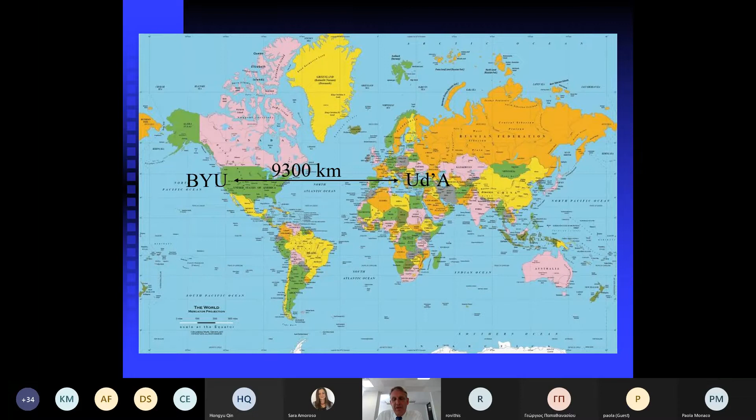BYU is about 9,300 kilometers from Chieti, so it might seem like we're a long ways apart, but if you have the right perspective, you'll see that we're next door neighbors. You have probably learned over the last year, like I have, that the world is getting smaller every day. With the new technology we have, we can interact with each other very closely, even though we might live around the world. So I'm using this perspective to think about each of you as my friends and colleagues.

Turns out I come from a line of geotechnical engineers. This is my father, Ralph Rollins. He performed investigations for about 5,000 structures and 90 dams when he was alive. Since he was a professor, I got to take soil mechanics and foundation engineering from him, and for me this was a real pleasure. I don't know if you would like having a class from your father or not, but I really enjoyed this.

This is my daughter, Rachel Rollins, who was a civil engineering student at BYU. Again, I don't know whether she enjoyed it or not, but she took soil mechanics and foundation engineering from her father as well. So I've written a paper with my father, and I've written a paper with my daughter. This is my granddaughter, Ella, who's showing some early interest in soil behavior, and we hope that keeps up.

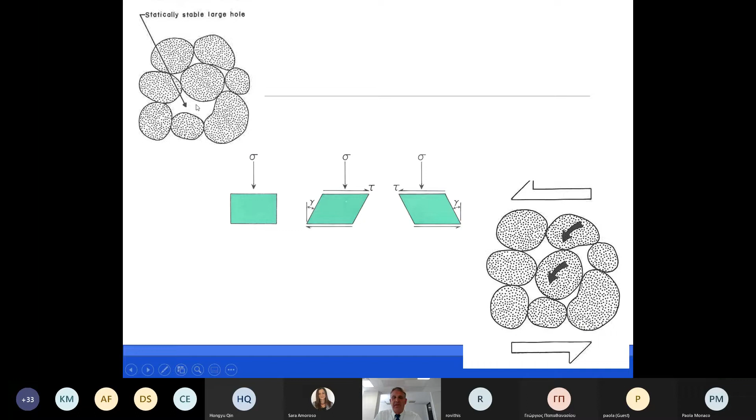Let's talk now about liquefaction. Sarah told me that there might be some who are new to this topic, so I wanted to give a little background. Liquefaction normally occurs in loose saturated sands, like you see up here, where this is saturated void space. When the earthquake starts to shake the ground and shear stresses are induced, there's a tendency for those sand particles to consolidate, and this increases the pressure in the water. Eventually the pressure in the water can equal the vertical effective stress and lead to a condition of liquefaction.

One of the leaders in our field was H. Bolton Seed, or Harry Seed, and he originated techniques for liquefaction assessment with simple methods that could be used by regular engineers. His approach was to use case histories to identify sites where liquefaction had occurred and plot them in terms of cyclic stress ratio versus blow count, taking open points where no liquefaction occurred and drawing boundary lines. These are defined as triggering curves that decide whether liquefaction would be triggered for a given blow count. In class, Harry Seed used to say, get the facts first, the theory can come later, then you'll have something to base the theory on. So he didn't try to fit the facts to the theory, he did it the other way around.

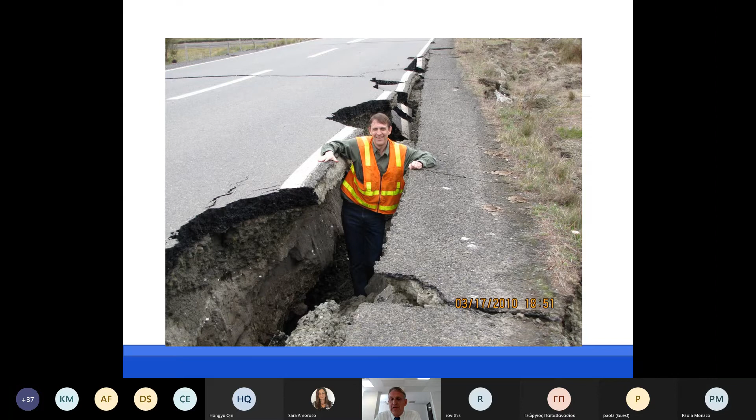This is a tradition that lives on in the United States with the Geotechnical Extreme Events Reconnaissance Team, where we receive money from the National Science Foundation to investigate after important seismic, landslide, and hurricane events. I was part of the team that went to Chile after the 8.8 magnitude earthquake, and part of the first team that went to Tohoku after they decided it was safe enough with the radiation being emitted from the damaged reactor. Here I am with Steve Kramer and Youssef Hashash as part of that study. These post-earthquake investigations are really critical for us to learn how things really work in the world.

Liquefaction can induce a number of problems. It can cause a loss of bearing strength, which results in settlement of our structures. It can cause flow failures. It can cause lateral spreading.

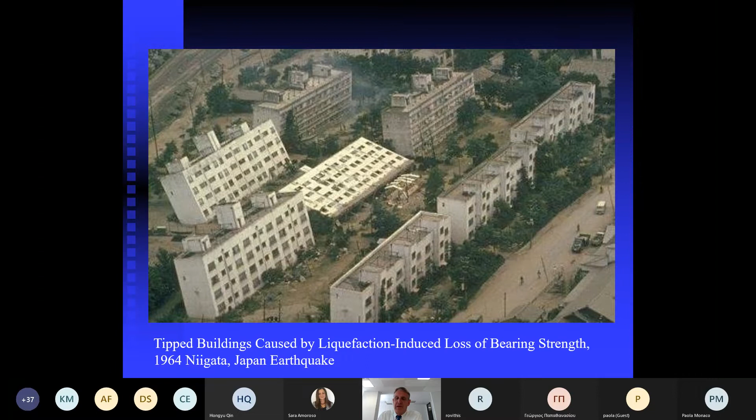When we talk about bearing capacity failure, a building may be perfectly stable on the soil in its static condition, whereas after an earthquake, when the soil liquefies, the building can tip and settle. Here's the classic picture from Niigata, Japan, where many of these buildings tipped and fell over. Some of the other buildings did not tip, because they have deep basements that gave the building much more stability. The other buildings have shallow foundations. This is what you might call a geotechnical failure, but a structural success story, because even the building windows weren't damaged and people could walk up and get their belongings and bring them back down.

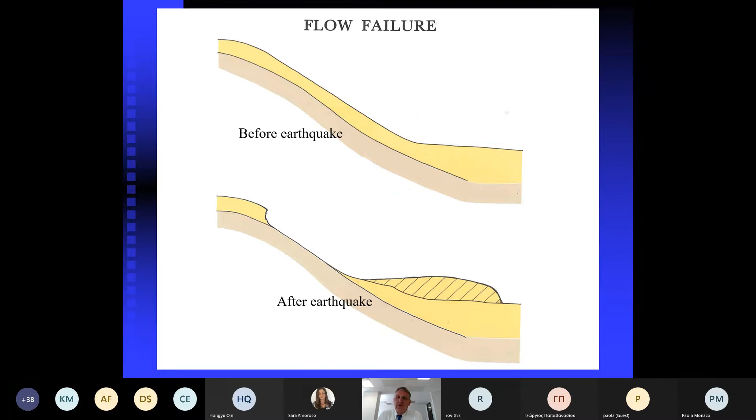One of Harry Seed's triumphs was reconstructing the cross-section of Lower San Fernando Dam based on the final failure surface, identifying these zones in blue where the soil had liquefied, piecing them back together and then identifying the area which had liquefied. As a result of this case history, we now have techniques for predicting performance of dams in earthquakes.

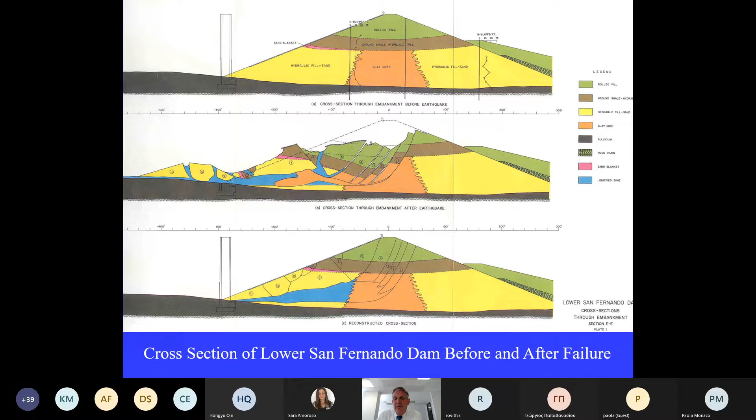A third problem is lateral spreading. Before the earthquake, potentially liquefiable soil might exist below a non-liquefiable clay layer. After the earthquake, the sand can liquefy and these top layers of clay can float along on top of the underlying soil towards a free face or towards a river.

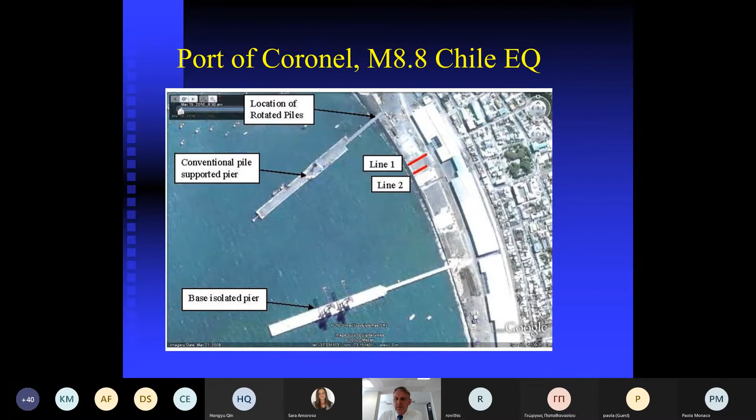We saw similar things at the port of Coronel after the Chilean earthquake in 2010, where this conventional pier was damaged to the point it could not be used. You can see the surface of the asphalt as a result of lateral spread, and many of the containers fell off of one another.

We went in and measured the displacement. There had been a little over a meter of displacement at the edge of the port, and it went back to about zero displacement within 20 meters.

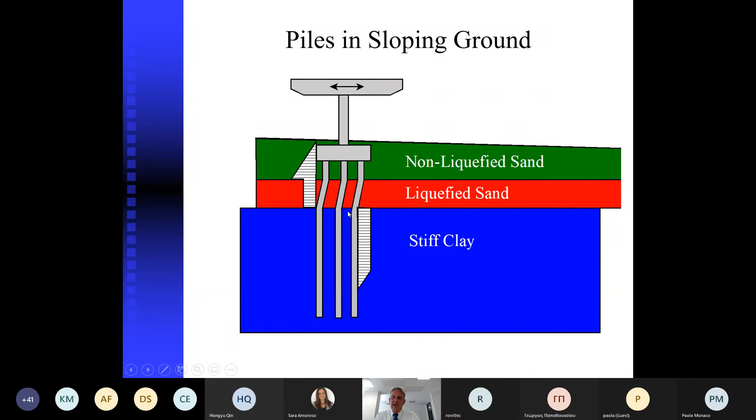Here's damage to piles at the port of Coronel in Chile. We wondered if this pile was a battered pile, but no, it had been driven vertically, and ground movement in this direction caused the pile to move about a meter. I have Dominic Assimaki here for scale, and you can see the ground has moved about half an Assimaki.

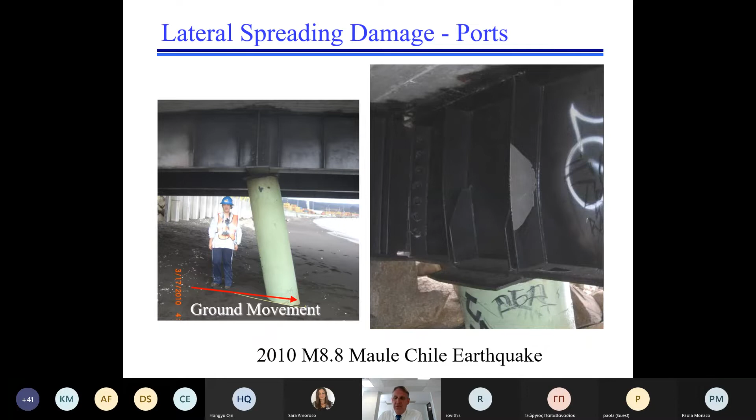As a result, we had buckling of the cross beam on one side, compression failure, and tension failure on the other side. My structural engineering friends tell me that's exactly what we want it to do, absorb all that energy and still remain stable after the earthquake.

How can we investigate this liquefaction phenomenon? We can do so with small-scale testing, with centrifuge models maybe 1/50th the size of the soil, or with laminar shear boxes, where these segmented steel boxes are shaken and move like they would in an earthquake.

But more frequently, we would like to see things at large scale and how the earth really performs. As mentioned previously, post-earthquake investigations are always desirable, but in many cases you don't have all the information you'd like to better understand how the bridge really performed, particularly if it had collapsed.

You can use a vibroseis truck to shake the ground and cause liquefaction; this has been very helpful in work in New Zealand. Or you can use controlled blasting, which is what we have tried. No method is perfect—each tells us a little bit of the entire story, so it's useful to investigate with all these techniques. But blast liquefaction has a number of advantages.

First, it tests at large scale. It can test the native soil in situ with real microstructure and aging. You can liquefy large volumes at one time, investigating the performance of an entire system, to maybe 10, 14, even 20 meters deep. We have seen settlement similar to that induced in a real earthquake setting.

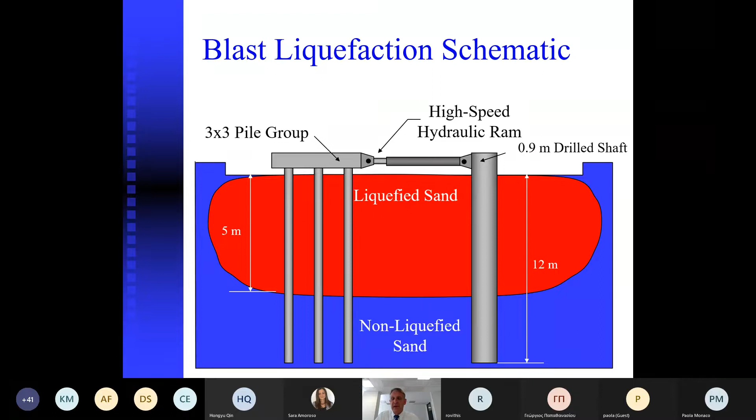And since that time, we've done tests like this at a number of sites around the world. So our dream has become kind of a reality here. Our approach was to first experiment to see what it took to cause liquefaction, prior to putting the foundation elements in. We liquefied the ground using these explosives and measured with piezometers to see that we really did liquefy the soil. Here we always use licensed blasters to do this work.

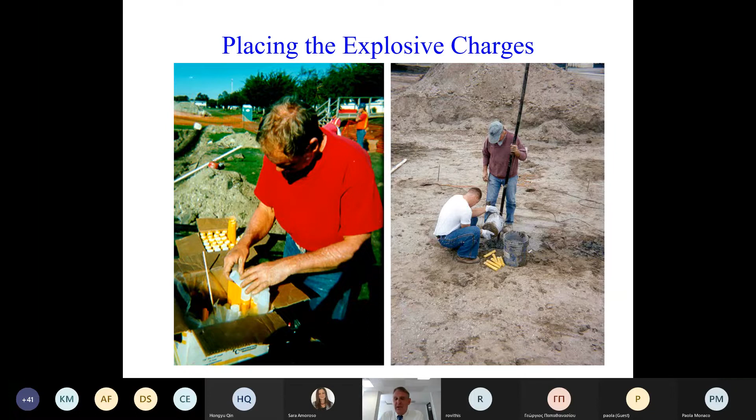This is Butch mixing the nitromethane and ammonium nitrate and putting it into the hole. And this was our first test.

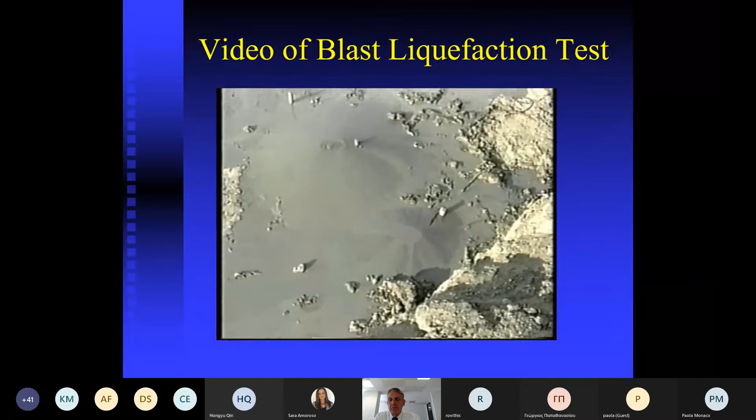This should look similar to what we saw at Tohoku in a natural earthquake, where there were liquefaction features, these sand boils or sand volcanoes, as a result of the testing. And from this testing, we were able to investigate the lateral resistance of a pile, first for a single pile, and then for a group of piles.

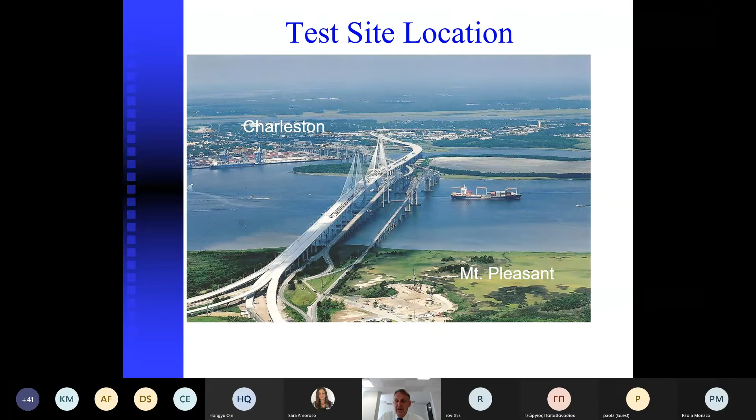Subsequently, we had the opportunity to do this test in Charleston, South Carolina, for a new bridge that was being constructed, a cable-stayed bridge, one of the largest in the United States. And the designers of the bridge wanted us to investigate how the foundations would perform in this situation.

One of the problems with the previous testing was that it was under static conditions, and we wanted to load it dynamically. So we used this statnamic load sled, a rocket sled, where we detonate fuel pellets, and they expand and have gases that move out in one direction, and that causes the sled to move in one direction and the foundation to move in the other direction.

So here's this sled being put into place on a little runway. It weighs about 100 tons. It's put into position in the combustion chamber, about 2.5 meters in diameter. Then this was fired off.

And just so you can see what that looks like, I'll show this video.

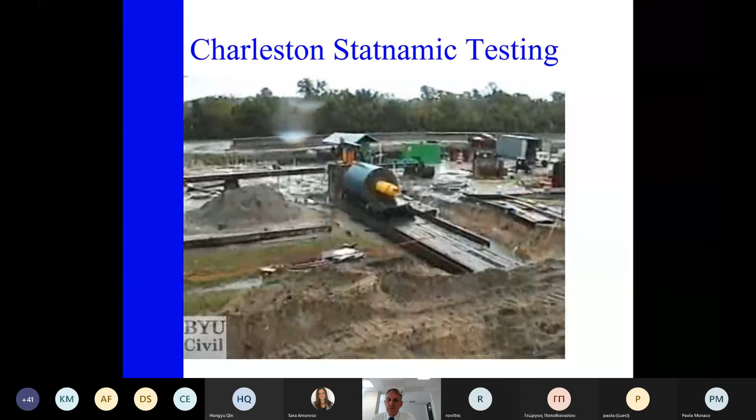It's about 7,000 kilonewtons. So there's opportunities for doing this. This has been done by a number of researchers, including my colleagues in Japan. They told me once, Kyle, your baby has grown up. They had a very huge, hundreds of charges going off to investigate a variety of ground improvement techniques.

It's also been used in Christchurch, New Zealand, and we'll talk more about this in a couple weeks' time at the second webinar. So blast liquefaction testing does provide a very useful method for evaluating pile and ground improvement in situ at large scale. It has the potential for liquefying large volumes and to great depth, and we can induce settlement and pore pressures similar to that from an earthquake.

It turns out I also have come from an academic family tree. Karl Terzaghi was the major advisor for my professor, Harry Seed. And of course, we all know Karl Terzaghi is the father of soil mechanics, and we can recognize Harry Bolton Seed as the father of geotechnical engineering. I haven't lived up to the full potential at this stage, but I can call myself the father of Rebecca, Rachel, and Chelsea, my 3 daughters, and maybe at some point the father of blast-induced liquefaction.

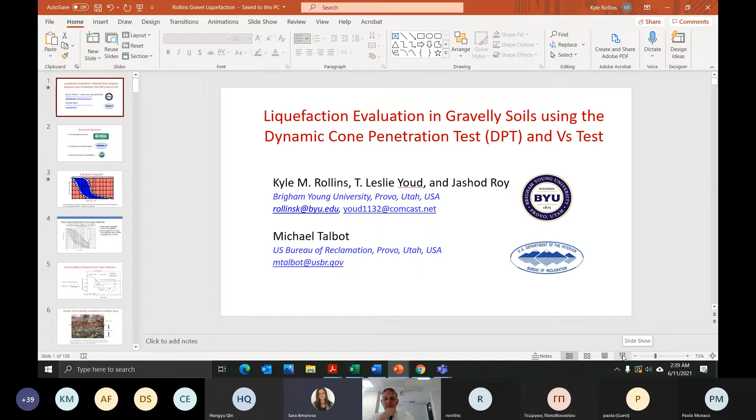Okay, I might mention that we've done several of these blast-induced liquefaction studies with Professor Amoroso and Professor Tonni and Gottardi at University of Bologna, and it's been a pleasure working here in Italy on these kinds of studies.

I'm going to talk now on liquefaction evaluation in gravelly soils using a new tool called the dynamic cone penetrometer test and also shear wave velocity tests. My co-authors on this study are Les Youd, who you might know as an expert in lateral spreading, and my graduate student Jashod Roy, and another graduate student named Michael Talbot, who works with the U.S. Bureau of Reclamation. This research has been sponsored by the U.S. Geological Survey, the U.S. Bureau of Reclamation, who's responsible for the design and maintenance of dams in the United States, and the National Science Foundation.

Based on some early numerical analysis, we have suggested that if the permeability is greater than about 0.004 meters per second, pore pressures will dissipate as rapidly as they develop.

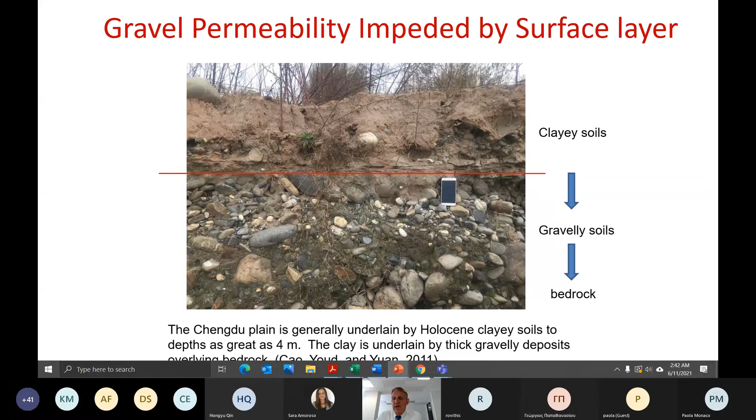There'll also be cases where gravel permeability is impeded by a surface layer, and this surface layer could consist of clay or silt, or even a thick layer of concrete, for example at a port facility. This is a photo of an excavation in China where they typically have 4 meters of clay overlying a gravel profile with fairly large gravel particles.

But there's now a growing set of case histories, even some in the last year or two in Croatia and Albania, something like 22 earthquakes in the last 100 years where gravel liquefaction has been reported. So it's not just an imaginary thing, it's something that is happening routinely in every major earthquake.

And two of those major earthquakes are in Italy: the Messina earthquake in 1908, and the Friuli earthquake in 1976.

So if we look at gravel liquefaction sites around the world, there's a growing number where people have identified gravels that have liquefied and done studies to quantify what's happening.

This becomes a major issue for older dams because many times they were built on profiles that contained liquefiable gravel, but gravel wasn't supposed to liquefy at the time these dams were built. Now it becomes a multi-million-dollar decision to decide if there is a liquefaction hazard, and if so, how that soil should be treated to prevent liquefaction in the event of an earthquake.

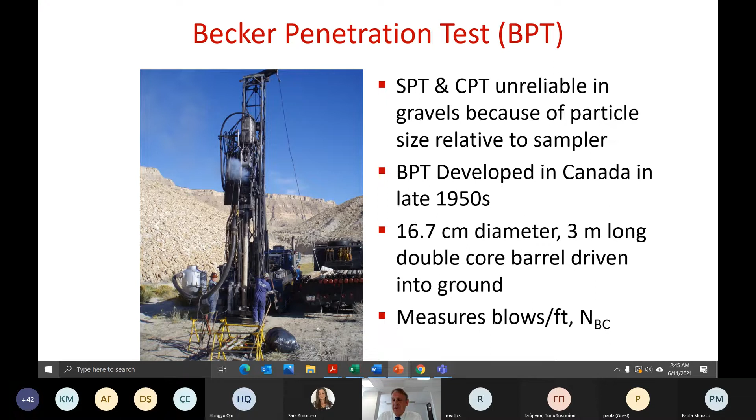So this BPT test was developed in Canada in the late 1950s to help address this issue. The diameter of the pipe is about 16.7 centimeters. It's driven into the ground in 3-meter long intervals in a double core barrel with a diesel hammer. It's like a small pile driving hammer, and it measures the blows per foot, which we call N sub BC, from the bounce chamber pressure.

Now, what has been done to utilize the Becker penetration test is to develop, in sand, a correlation between the SPT blow count and the corrected Becker blow count. So if you had a blow count of 40 from the Becker penetrometer, you could then determine what the SPT blow count would be to use in your analysis.

Then you could come to your favorite model for liquefaction triggering and determine the cyclic stress ratio which would cause liquefaction.

One of the problems with this technique is that it has a straight-sided pile, and the result of that is that you can have friction on the side of the pile, which will reduce the amount of energy that's transferred into the pile or into the Becker penetrometer, and artificially increase the blow counts.

So Jason de Jong has come up with an innovative technique to measure the force that's transmitted to the bottom of the Becker penetrometer, and has developed a new correlation between the penetration resistance at the bottom and the SPT blow count.

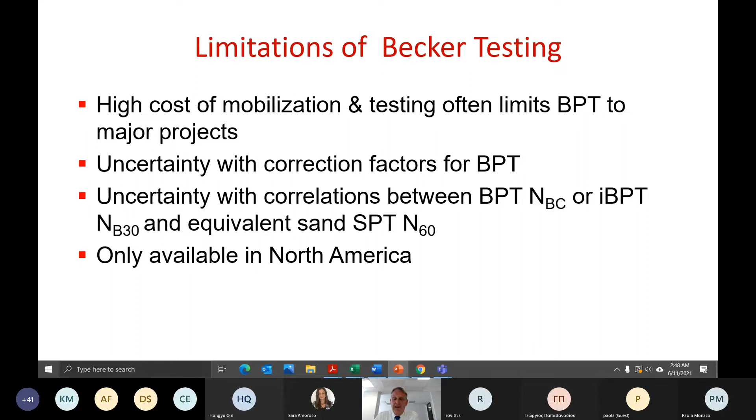Some of the limitations of Becker penetration testing: there's a high cost to mobilize it to a site in the United States, and the testing costs are often high enough that we can only use this for major projects, not routine testing at all. There's some uncertainty with correction factors for the Becker penetration test, and uncertainty with the correlation between the blow count for the Becker and the blow count of our equivalent sand. Probably the biggest problem with this method is that it's only available in North America, so most of the world doesn't have access to a test like this that could be used in critical cases.

One technique is the Chinese dynamic cone penetrometer. It's capable of penetrating loose to medium dense gravels. It's relatively fast, simple, and economical, so it can be used for routine projects you might encounter any day of the week. The most important advantage, I think, is that the triggering curves are directly based on field performance, just like all our other curves are. When we use SPT or CPT, we have a direct correlation based on case histories with that test, and we're trying to do the same thing with the DPT.

The Chinese approach is to use a tripod, lift a 120 kilogram weight to a height of 1 meter, and then let it free fall. The cone is 74 millimeters in diameter. It tapers backwards to a smaller diameter drill rod, so there will be less friction between the soil and the rod, making it a more reliable test.

This is about 2.5 times the energy of the SPT test. So you have more energy, a larger penetrometer, and less skin friction. The cone is driven continuously in the ground. You don't get a sample, but like with a conventional cone penetrometer, you get a continuous reading of the blow count versus depth.

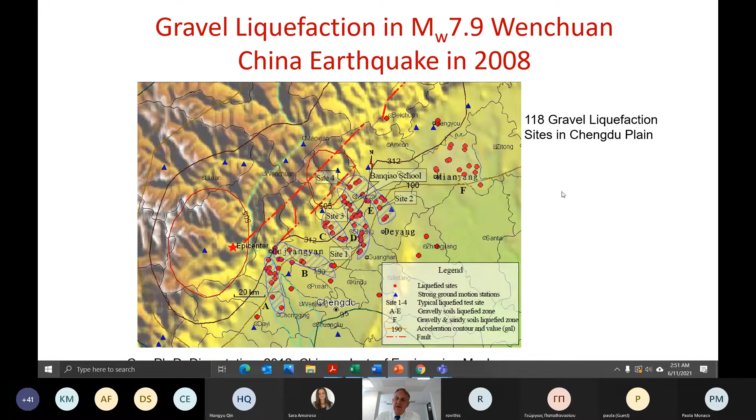This test was first used for liquefaction assessment by the Chinese after the 7.9 Wenchuan earthquake in 2008. When they started to investigate sites, even sites that had what looked like sand ejected at the top, they discovered that the sites were largely sandy gravel. They started the work of investigating 118 gravel liquefaction sites in the Chengdu Plain.

Here's one case history, a lateral spread at Banqiao School. They had 20 centimeters of differential settlement here and had to demolish the school and start again. There were lateral spread displacements of about 1 meter towards this canal or channelized river.

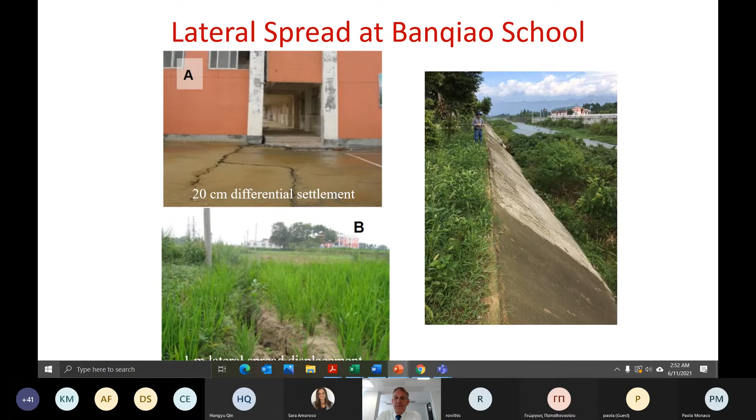One of my colleagues, Les Youd, went to China and recorded the amount of energy that was being transferred into the drill rods as a result of this free fall triggering system, and found that on average they have about 90% energy transfer, using a pile driving analyzer.

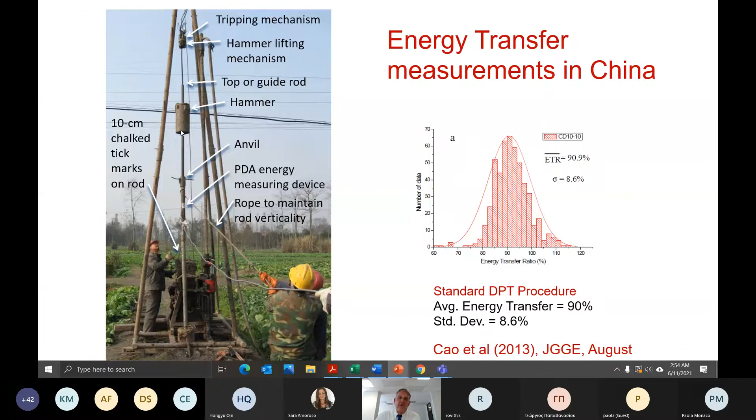And even in some cases they get low counts that are energies higher than 100%. What was happening was the hammer was going higher than a meter before dropping, as they were pulling it up very rapidly. So that's the standard we're comparing against.

We also want to look at triggering in terms of shear wave velocity. The advantage of this is it may not require a borehole if you are doing MASW testing, but there is some uncertainty with this approach. One of the other questions would be, are the curves for sand appropriate for gravel? Or do we need to adjust the curves to have a new triggering curve?

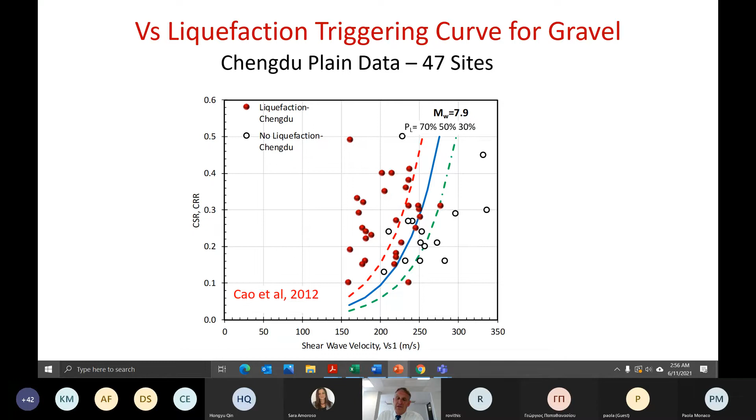We also want to know if we can reduce the spread in the DPT triggering curves with additional data points. Will the factor of safety we get from the DPT be similar to that from our Becker penetrometer? And can we use less hammer energy to do this?

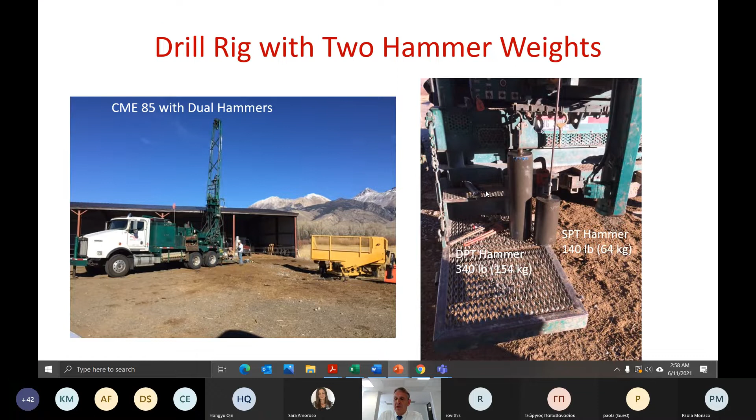At each one of these Becker holes, we did 2 DPTs with the different energy. In the United States, we have a rig built by CME that will allow us to switch from the SPT hammer to the DPT hammer relatively quickly, in about 10 minutes, so we can do both tests.

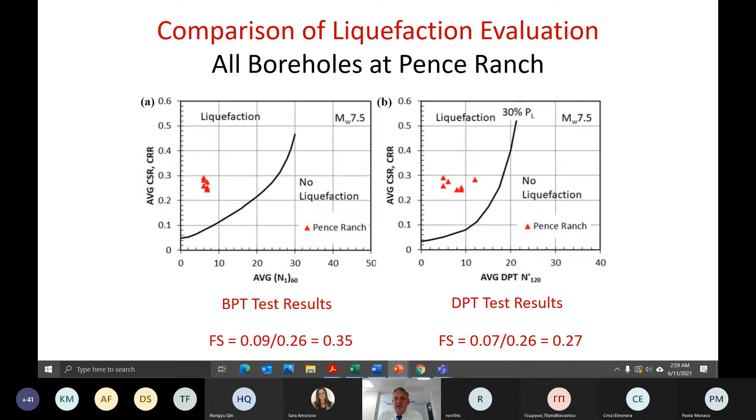So what we did is a liquefaction evaluation at the critical layers with the DPT and the BPT. At all the boreholes at Pence Ranch, for example, we have a factor of safety of about 0.35 with the BPT procedure and about 0.27 with the DPT procedure. So this is giving us some encouraging results - the two hammer energies, after correction, are giving us similar blow counts.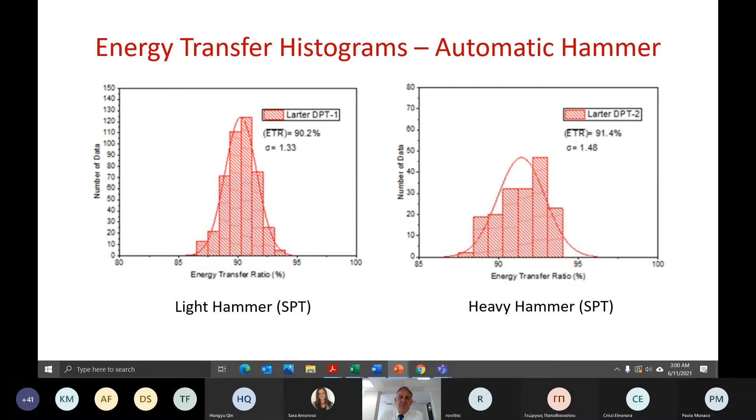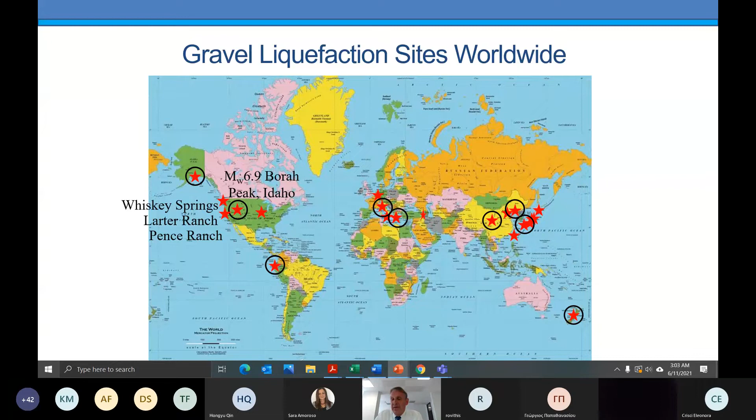So here's a port at Manta, Port of Ecuador, in the Ecuador earthquake, 7.8 magnitude event. This is a pile-supported wharf. Going under the wharf, we could find after the earthquake that a lot of these piles were badly damaged. And when we looked at why that was, we could see that there was a large crack here.

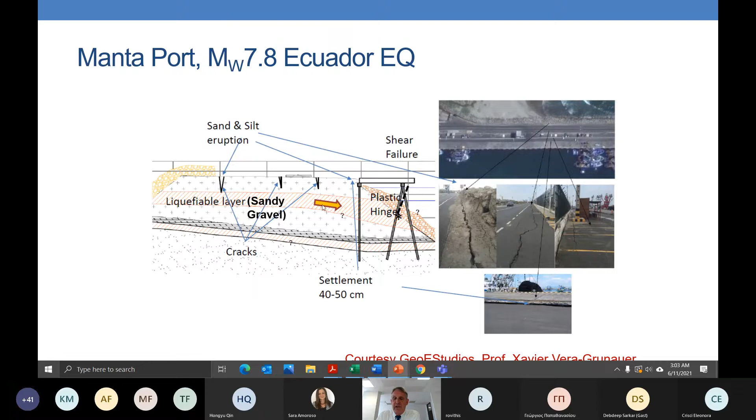Our colleague Xavier Vera worked with us and did tests with the DPT at the port, and they found out that the zone that was causing the sliding and the lateral spreading here was a sandy gravel layer. The sandy gravel had between 15 and 70% gravel sized particles, but with enough sand to still allow it to liquefy even without a bounding layer.

Javier did 7 DPT soundings with energy measurements and also 7 V-sub-S profiles with MASW. And you can see here the zone that is liquefying is this zone from about 3 to 6 meters.

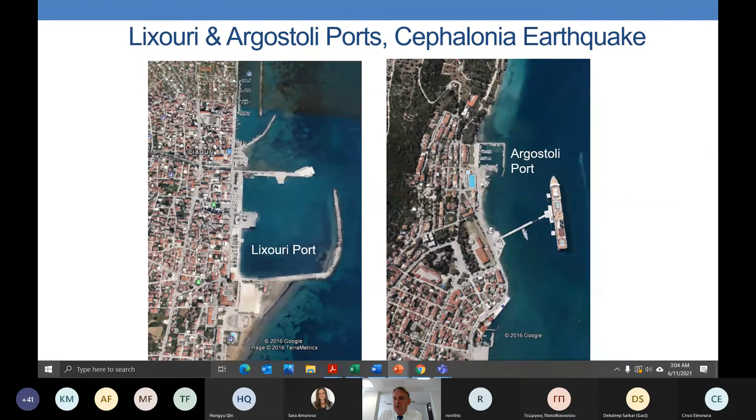We had the opportunity to go to Greece, to the island of Cephalonia, where liquefaction had occurred at several ports, the Lixouri port and Argostoli port. Here you can see lateral spreading that had occurred towards the face of the port. And the ejecta was both sand and gravel coming out of the fractures.

So we used something like 7 locations at this Lixouri port, 5 DPTs, with SPT hammer energy. We did PDA measurements. There were 2 where the gravel was much too large to penetrate, so we couldn't do those, even with our system. We had a track-mounted penetrometer, which was easily able to go everywhere we needed it to, and this PDA device.

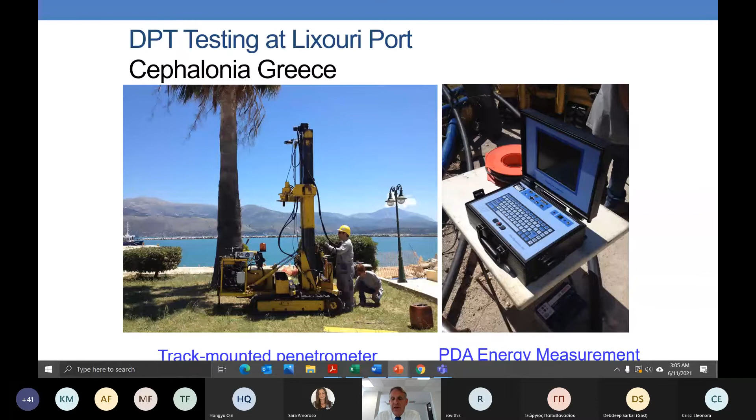If you have to go to a site to do some work, Cephalonia Island is a great place to go, by the way. This is, again, the zone that was identified from the DPT testing, and we have a number of these points that are above the triggering curve, so they're where they should be. These are the average values in those ranges.

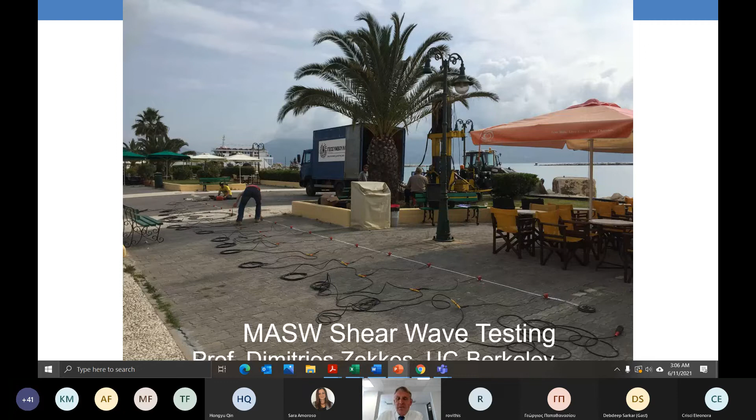Argostoli port did similar work. This is the liquefied layer and the averages, again, above the triggering curve that had been previously established. And our colleague, Dimitrios Zekkos, did MASW testing along the port with his student, John Hubler. So we have this data as well. This shows a plot at the Lixouri port, the Argostoli port.

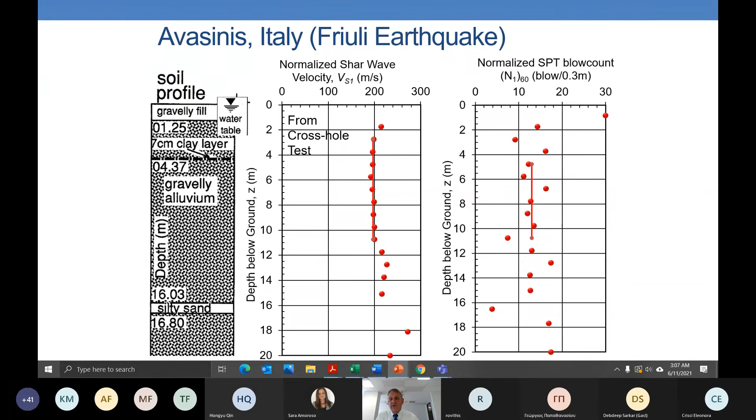We had the opportunity to work with INGV and Professor Amoroso in Friuli to occupy sites where liquefaction had occurred and been reported by Sirovich after the 1976 earthquake. This is an alluvial fan deposit, and there were 3 separate events where liquefaction had occurred. We had 3 sites that liquefied and 1 that did not, and we did DPT at 2 hammer energies there. Here you can see some of the gravel particles in the ejecta in this cornfield. A previous crosshole shear wave velocity test was available here. The grain size distribution curve showed that maybe 20 to 40% of the material was gravel sized.

Here's the DPT testing taking place, and here's the instrumented rod used to measure the energy transfer. From this we can identify the critical layer. This was recently published in 2020 in the ASCE Geotechnical Journal.

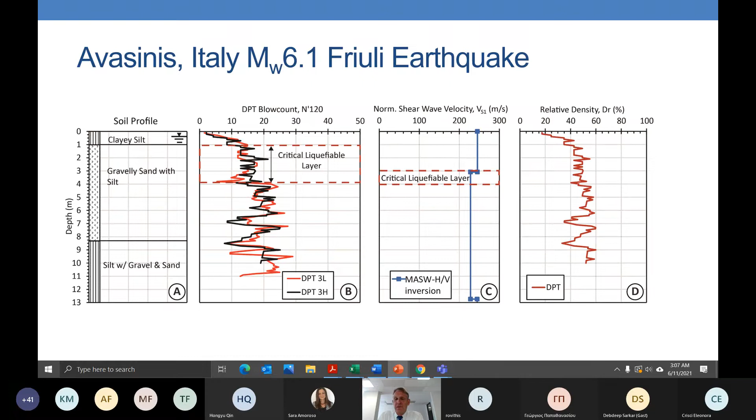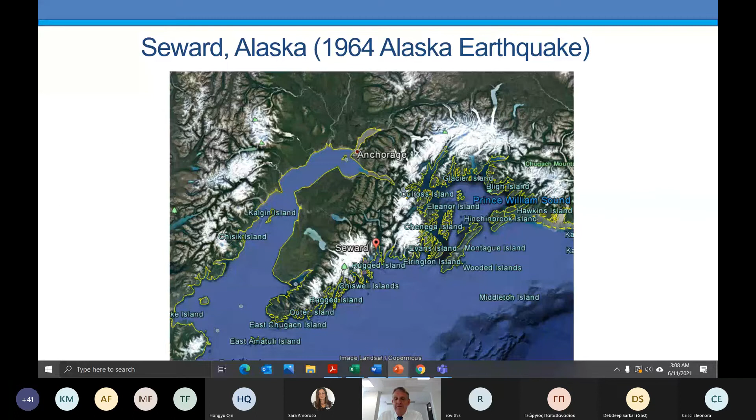Next site was Seward, Alaska. Our colleagues at the Department of Transportation there said come ahead, we'll pay for the drill rig and you can test. This is a site where bridges were badly damaged in the 1964 Alaska earthquake, with large lateral spreading. We did a number of DPT holes here.

The nice thing about this method is that it can operate very quickly. We did 8 DPT holes to about 15 meters in 2 days. We also did PDA measurements, with 2 hammer energies at each of 4 sites where the ground had failed due to lateral spreading, and we had some nearby cross-hole Vs measurements.

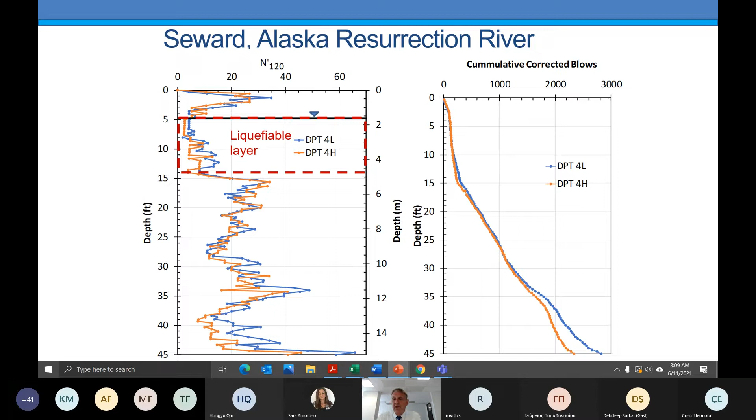This is the liquefiable layer that can be identified here. We also decided to start using a cumulative blow count so that we could compare the blow counts from the light hammer, shown here in blue, and the heavy hammer, shown in orange. If we evaluate over a cumulative interval rather than at each depth, we see very good agreement between the blow counts of the two cases.

If you plot the light hammer blow count versus the heavy blow count, you'll find cases where there's an offset in the stratigraphy that causes confusion. So we would recommend doing this cumulative approach to get the comparison, rather than comparing at the same elevation.

So we've looked at the critical layers from the DPT and from the shear wave velocity, which were quite evident.

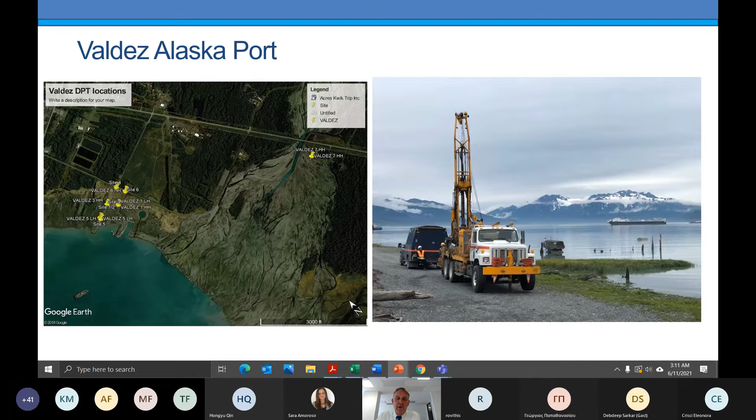We went out to this site and did DPT tests just leading up to where the major landslide occurred, with up to 7 to 8 meters of lateral spread displacement. We were a little nervous whether the DPT could really penetrate through these materials, these very large diameter river gravels. So we decided to try it, and here's the probe penetrating into the ground.

That's an automatic hammer, and it operates very quickly, penetrating about a meter in something like 25 seconds.

Then more recently, we had the opportunity to test at Wellington in New Zealand, where this CentrePort was badly damaged by gravel liquefaction in the Kaikoura earthquake, where peak ground acceleration was 0.22 g.

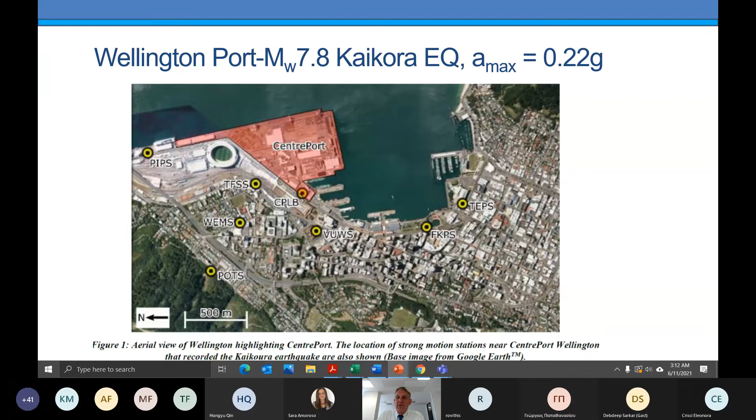It's difficult to test at a port, so we worked with Misko Cubrinovski, who helped us get access at the same sites where he was doing CPT testing. These are our DPT sites, situated at locations where liquefaction took place.

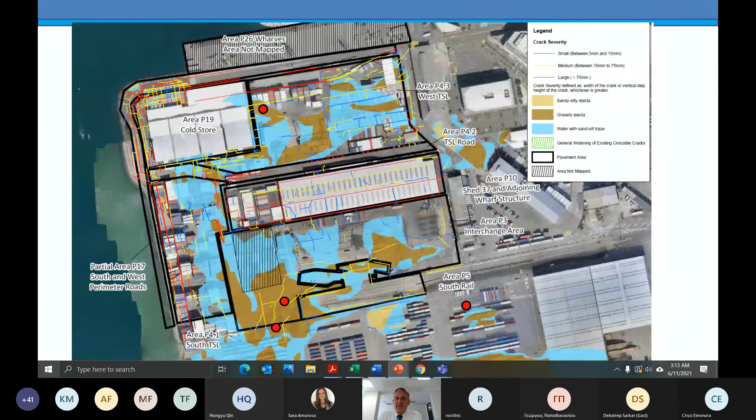It's very important to also have data from cases where no liquefaction took place. So we went to Valdez, Alaska, a site where no liquefaction occurred, to get data to constrain the curves. And we came to L'Aquila, Italy, working again with Professor Amoroso and her students, to find cases that did not liquefy. These are very important and critical to keep the curves from just wandering towards the right. So we did that, which turned out to be very helpful.

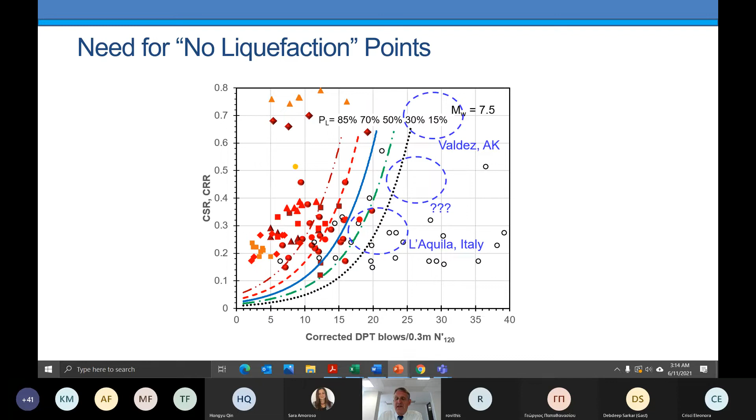Most of our data still comes from China, followed by the US, New Zealand, Greece, and Italy. There are a variety of geological environments, from alluvial fans to glacial fluvial deposits in Alaska. We have a range of magnitudes, and most of the data is within 14 meters of the ground surface, which is very typical of liquefaction case histories.

These plots show the revised triggering curves, this one for the DPT. Here's our DPT blow count, and here's the cyclic stress ratio. All these solid data points are liquefied, and all the open points are sites where gravel did not. You can see these points from L'Aquila were very influential in constraining the curve on the right, along with the data from Valdez, Alaska, where no liquefaction occurred.

So we now have 137 case histories. We're looking for more, of course. They're from 7 different countries, 10 earthquakes. This is a 200% increase in the number of data points we originally had from China, and now instead of just having data from one earthquake, we have them for 10 earthquakes.

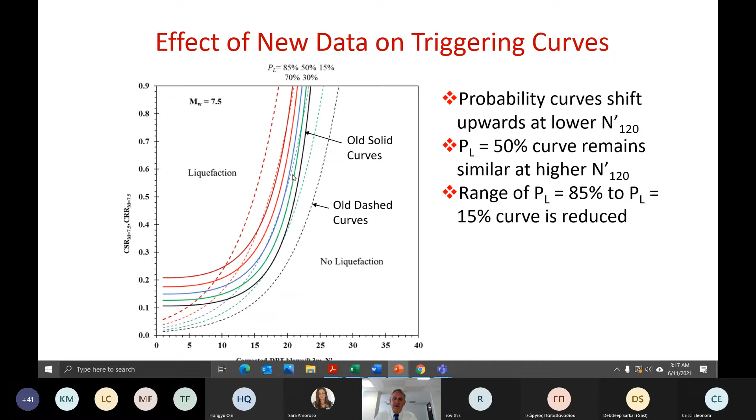If we compare what we had previously, the probability of liquefaction curves are shifting upwards, particularly at low blow counts, to match the results and behavior we had from Greece and New Zealand. So the case histories have made a change in what we're using now to analyze. At higher blow counts, the probability of liquefaction for 50% is about the same as the original Seed curves, but the width of the triggering curves from 85% to 15% has narrowed substantially, so we have less uncertainty about where the boundary of liquefaction and no liquefaction needs to be.

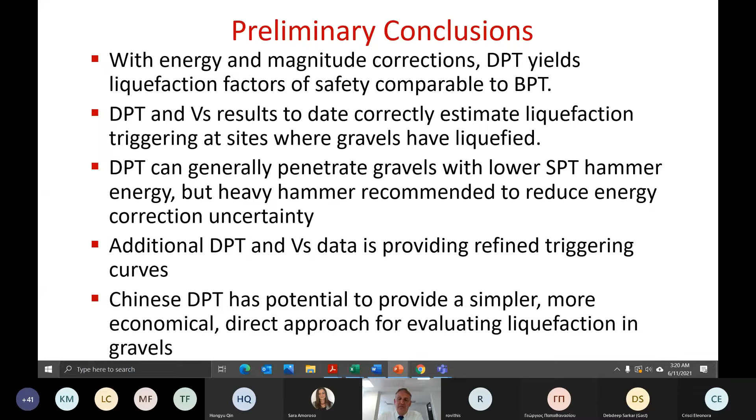Any questions about gravel liquefaction issues?

So in all these cases, we would like to estimate the displacement accurately so that we can determine if our structural elements can tolerate these movements. And if not, we may have to do some ground improvement, or we could potentially increase the strength of our structures, or potentially make our structures more flexible and able to adapt to the displacements that might occur.

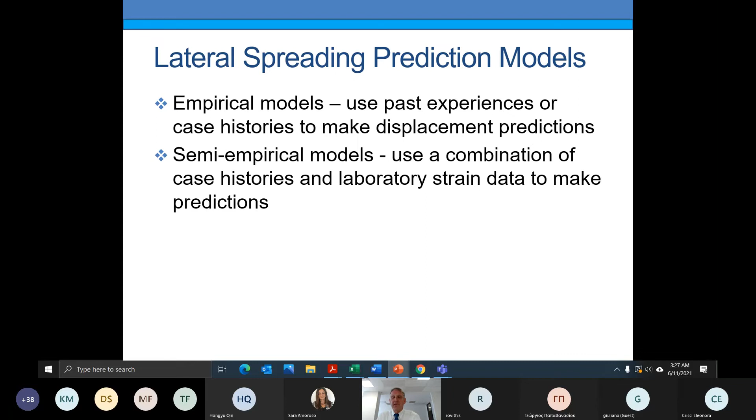Lateral spreading prediction models can be divided into two general types. One are straight empirical models that use past experience or case histories to make displacement predictions. In contrast, a semi-empirical model might use a combination of case histories and laboratory strain data to make predictions. So you may have a relationship between shear strain and relative density from your laboratory, and then you use that to correlate with displacement in the field case history.

So there are at least 6 models that I'm aware of. I don't know how much time we have to spend on all of these, but we've got maybe 20 minutes. I'm going to focus on the Bartlett and Youd and Zhang et al. approaches in the empirical models, and Faris, which was developed at UC Berkeley, and the Zhang, Robertson, and Brachman approach that Peter Robertson and his colleagues developed back in 2004.

There is one case history, the Alaska earthquake, with a magnitude of 9.2, but basing much of the analysis on one case history is asking for trouble. Most models have included this, but it's rather uncertain whether they are appropriate for this large range of magnitudes.

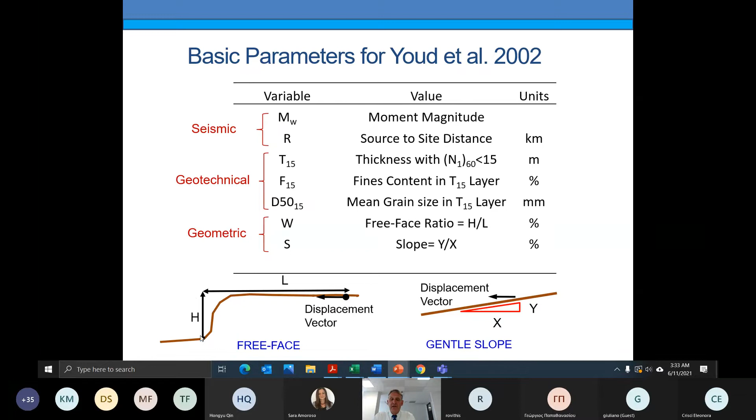Then we have a third set of parameters - geometric parameters that depend on the slope and the offset. S gives the slope of the curve, or y over x. If you have a gentle slope, less than maybe 3 to 5%, or if you have a free face, say at the edge of a river, they recommend using the free face ratio, which is the height of the free face divided by the length to the point where you're computing displacement.

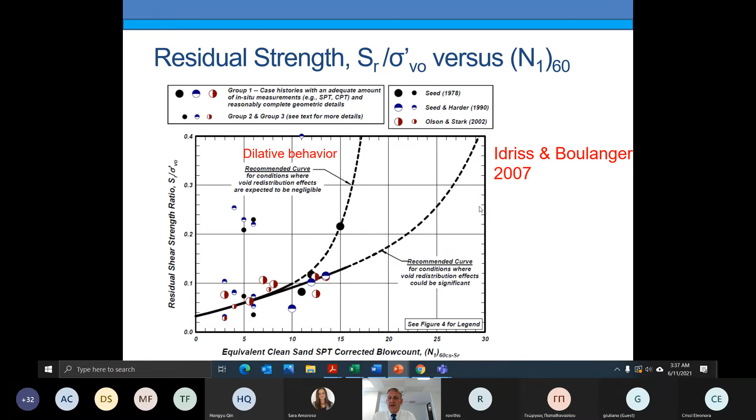Well, if you look at the residual strength curves developed by Idriss and Boulanger in 2007, I believe, they show a curve where the soil is dilative, and where the soil starts to dilate and gain strength, and the pore pressures go down, we see a significant increase in residual shear strength. And it's right about this boundary of 15 to 16, 17. So this is suggesting that soil in an undrained condition becomes very strong due to dilative effects at 15 or higher, and this could explain what's going on.

Youd suggests that if you have a liquefiable layer in a slope, then you make this the height of the free face in the free face ratio. He also suggests that you limit the zone considered for liquefaction to a depth equal to h below the toe of the slope, where h is the height of the slope. His contention is that if you have a pipeline or something below that boundary, the potential for lateral spreading is very low, because the spread would occur above that zone and not cause damage to your pipeline. This needs to be tested with numerical models and more field case histories, but it's worked so far.

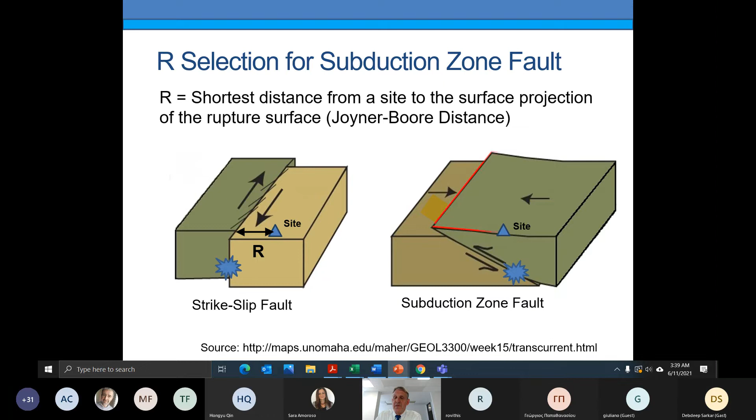One of the problems with the Youd method is the selection of the distance to the source for a subduction zone fault. If we're working with a strike slip fault, we can easily get this distance and it will have some positive value. If we're using a subduction zone fault and our site is located here, then the R value we get is going to be 0, because we're already within the zone of surface rupture according to this Joyner-Boore distance. So in this case, and we'll see the problems this causes, we're almost always at a 0 value.

So when Youd and Bartlett used their method in Alaska, they went from the zone of significant surface energy release, from this distance right here, instead of using the distance from the fault surface of rupture. They used this distance to try and get a better fit with the behavior in the Alaska earthquake.

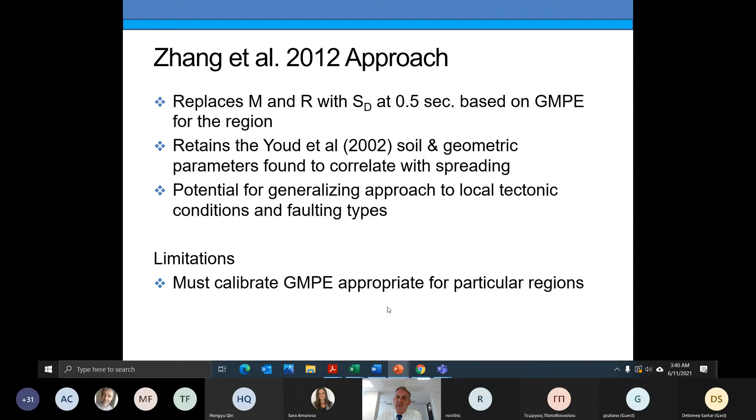To deal with this problem, Zhang et al. in 2012, this is different than the Robertson equation, replaced the magnitude and scale and distance factor with the spectral displacement at 1/2 second period. This is based on a ground motion prediction equation for that region. Then they kept everything else the same as the Youd formulation. The problem with this is now we have to have a calibration of a ground motion prediction equation for each particular region. Zhang was able to get a little better agreement, but not a lot more with his model, but it doesn't have that problem with the R value.

Let's look quickly at some semi-empirical models. I'm running out of time, but Faris's model requires you to have the peak ground acceleration and the magnitude. So here again, we don't have to worry about the R distance. It uses the SPT blow count and correlates with shear strain, that's the geotechnical parameter. Then for the geometric parameter, it uses the slope angle or the height divided by 0.25 times L max, which is the maximum length of failure.

This correlation is based on maximum ground movement. Instead of giving you the displacement at different distances from the free face, it'll only give you one value, and as a result, it's going to give larger values than Youd.

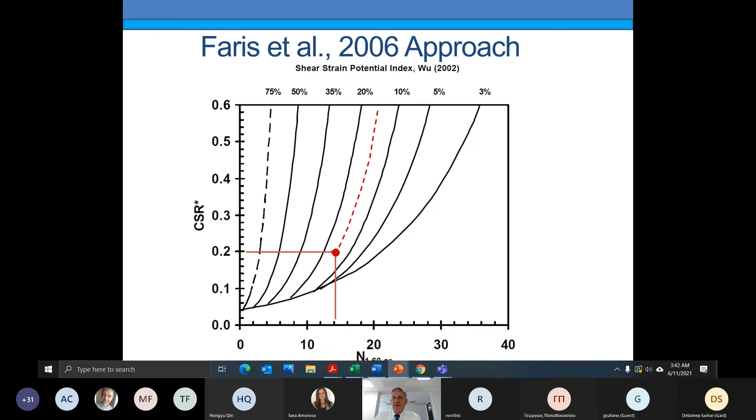Liquefaction assessment is based on the Seed et al. approach, supplemented by the Youd et al. method. For example, with Faris, if you have a blow count of say 14, you can come to this curve and get your strain potential index for a given cyclic ratio. That would say the maximum strain you could have from laboratory testing is 15%. So for each layer within the liquefied zone, you'd find this maximum strain potential.

You'd multiply it by the thickness of that layer and get your damage potential index max. Then that would be used to calculate the maximum displacement with this empirical equation based on this DPI max and some slope properties.

Here's her original database. Does this look familiar? It should. Again, if you look at the predicted and measured 45-degree line, we're off by a factor of 2 in both directions. So trying harder, with a little better, more refined seismic parameters, doesn't give much better estimate.

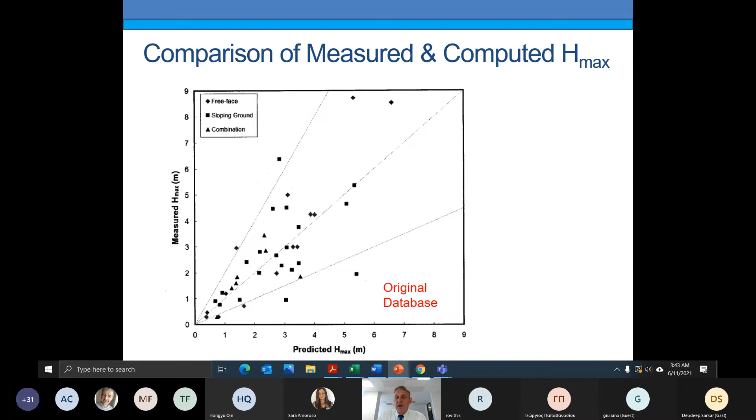So it eliminates the R term. It correlates with the physical shear strain. It considers layers with a blow count greater than 15. There's no limitation on depth, unlike Youd, and it only provides a maximum value.

Zhang et al. gives you peak ground acceleration and M sub W for the seismic parameters, a correlation between cone tip resistance and shear strain for the geotechnical properties, and the slope angle or free face ratio. Displacement is based on maximum ground displacement again, and he uses an adjustment based on Ishihara's work.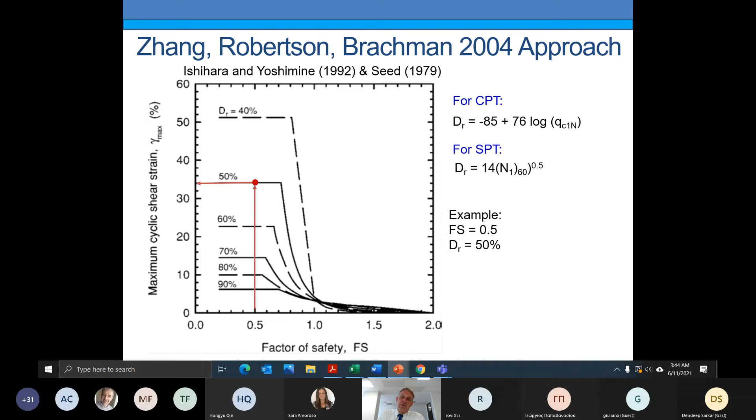So if he has a factor of safety of 0.5 against liquefaction and a D sub R of 50%, you get a maximum strain of 32%, 34%. Then again, like the Faris model, you add those up to get an LDI max, and then use this empirical correlation for different slope geometries.

And here's what he's getting for these different slope geometries. Look familiar? Once again, we're off by a factor of 2. This may be about as good as we can do with these empirical correlations.

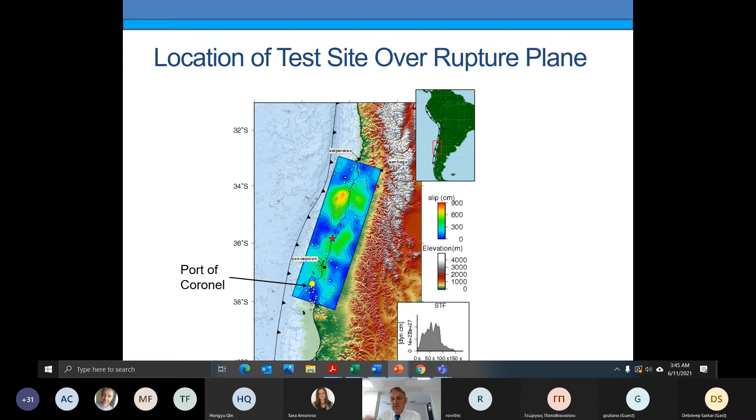I'm going to skip quickly because I'm running low on time, but we looked at the Chilean earthquake, which had a very large rupture zone that you see here, and our site lies directly above the rupture zone. In this port, the Port of Coronel, we have 4 piers that we studied here, here, here, and here.

It turns out that as you go further south, you get more shallow deposits and less lateral spreading. So here we have a maximum of 2.8 meters of lateral spread, 1.5, 0.47, and 0. So it's kind of like a full-scale laboratory to see how our models do with 4 different case histories in our big sandbox.

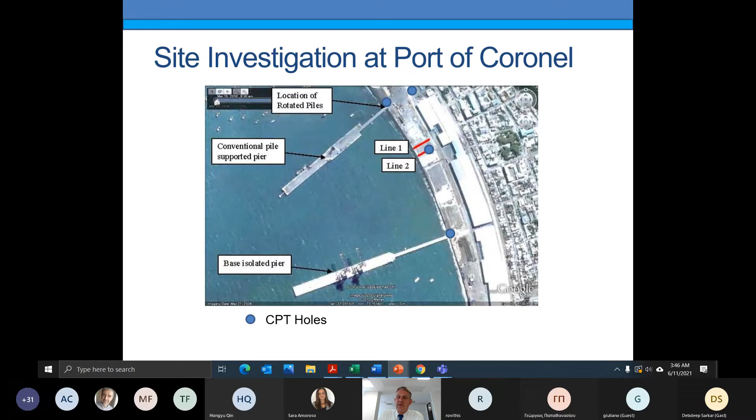As part of our work, we did site investigations at this Los Rojas Fisherman's Pier. We have tests out in the ocean, CPT tests as close as we could get, here, here, and here. We also have some CPT holes at each one of the other sites, and some on the pier itself that we were able to obtain.

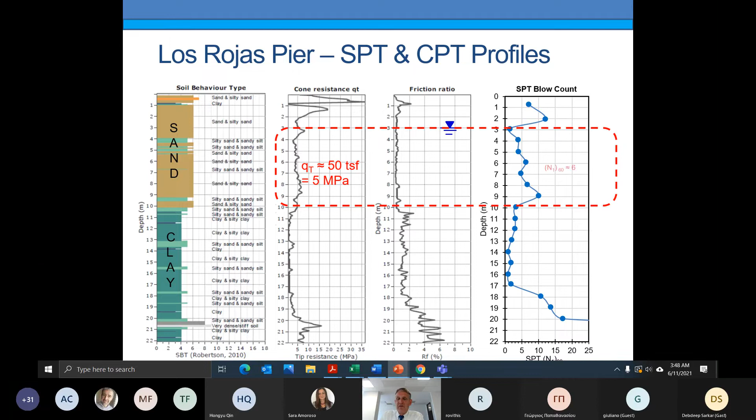Again, 2.8 meters of displacement. We have a sand layer down to 10 meters and then clay, so this data is available for analysis. The water table is about 3 meters, and we're considering this zone, which has a cone resistance of about 5 megapascals and a blow count of about 6.

Here's the retaining wall at 2.85. This is back at that pile that was badly damaged from lateral spreading from this ground movement, where we have 14-degree rotation at the pile head and a displacement that is known at this level as well, which is about 0.5 meter.

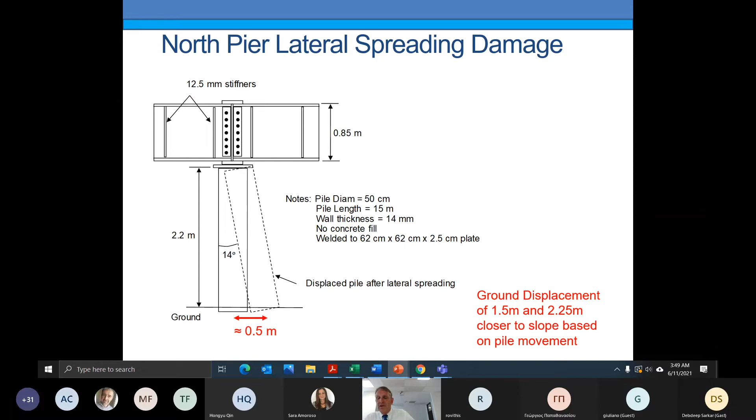So the ground displacement of 1.5 to 2.25 meters is closer to the slope based on pile movement. For each one of these, we also came up with the T15. We have a thicker zone at the north slope, 4 meters, that's less than 15, fines content of 11, D50 of 5, and W of 15 to 20. So this is the zone we're looking at, this layer right here.

The south pier only displaced 0.47 meters, relatively little offset. In these cases, our cone tip resistance was 15 to 20 megapascals, and we had blow counts in almost all cases bigger than 15. We have one at about 16, and we still had some displacement here.

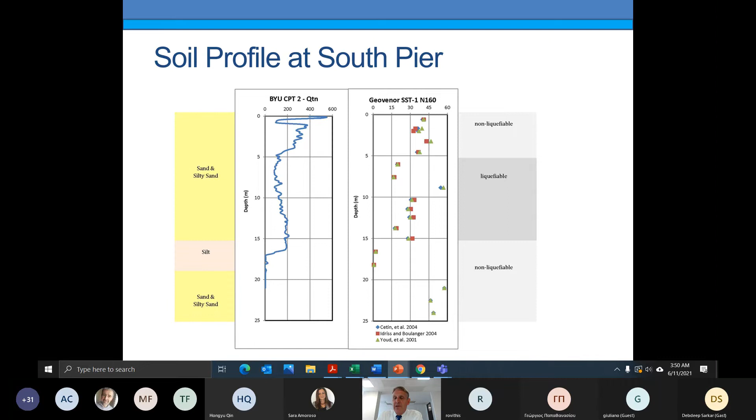So this is a very large earthquake. Youd had used the 15 as the limit for magnitude 7. So this is one case history that proves that it could have a little displacement, some displacement, if it's for bigger magnitude and longer duration events.

So the south pier, we have a thinner T15, higher fines content, and lower D50, and that has led to less displacement. We looked at the displacement between the piers with some CPTs there. Here again, we have higher T values, so it correlates well between the piers.

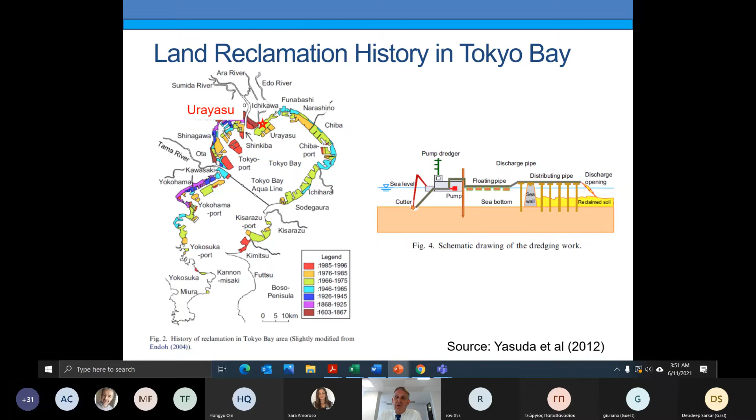We also threw in some data from Tokyo Bay. Surprisingly, with all this filled material, we looked around and we could only find one case history where there was lateral spreading, despite this very large earthquake and what you would consider were soils susceptible to liquefaction.

The distance from the rupture plane to Tokyo Bay is 110 kilometers, and the peak ground acceleration at that point was 0.17 G. So this is the site where we have one lateral spread, right here.

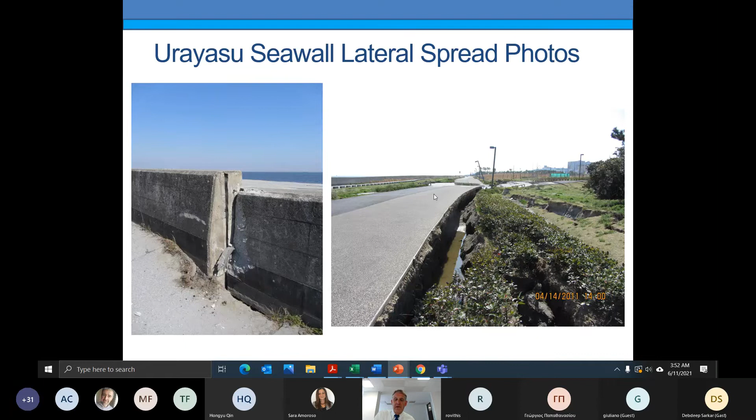I was wondering why there's so little displacement, and it turns out that these fill materials have relatively high fines contents, 30 to 40% typically on average. I think as a result of that, the lateral spread displacement predicted with the Youd method predicts very low displacements.

The critical zone here is shown at 3 to 4 meters. It's fairly thin, high blow counts. So in comparison, selection of the R value is very difficult.

If you go out to the fault rupture, you would use 160 kilometers. Joyner and Boore would say 0.5 kilometers to use in the mouth in the Youd and Bartlett and Youd approach. Maximum coastal uplift is at 47 kilometers.

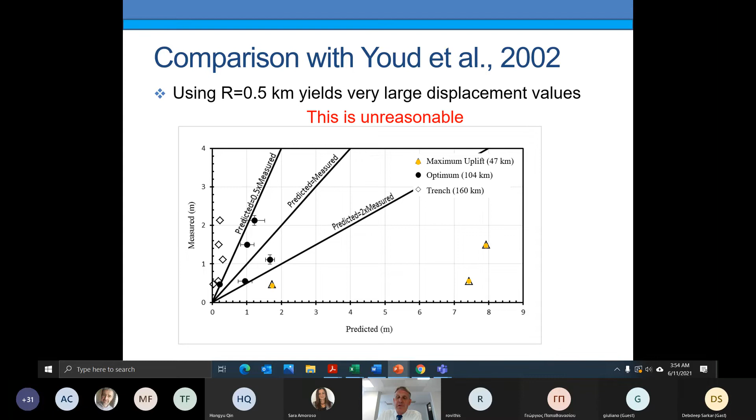So we tried using the 0.5 kilometers, which is what Youd suggests, and we get unreasonably high values measured in comparison to what we actually got. So we're not getting close to this. And when we use the maximum uplift, we're on the other end of it, but we think this is unreasonable to use this approach.

One thing that we did find interesting, that the seismologist might be able to give us some better understanding about, is that based on the aftershocks, they found the location of the rupture surface, or these big asperities where a lot of the energy was being released, and the closest to our location was about 104 kilometers. When we put 104 kilometers in, all our data plots in the right position.

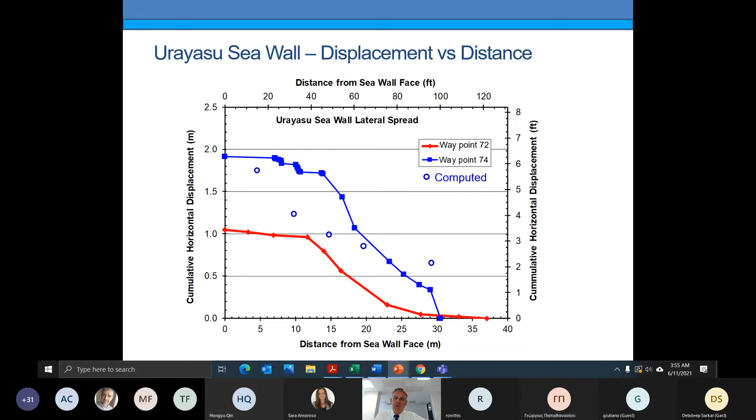And if we do the same thing with Tohoku, where we're outside the shear zone, we get really pretty good agreement with what was measured. Looking at this versus distance, the agreement's not too good, but considering the uncertainty that's involved, it's not too crazy from what we'd predict versus what was measured.

The Zhang method, we would hope that it would do better. It does all right with the case histories in Chile, but when we add the Alaska data, it is not giving us good values. Similarly, if we add the Tohoku data, it's outside the range of what's predicted. So it needs some work.

The Faris approach is giving us predicted values that are a little too high. It's just on that boundary. When we add Alaska in, it's okay, and Tohoku is predicted well. So the Faris approach is not doing too badly.

And then in our comparison with Zhang and Robertson, again, we're over-predicting the settlement, or over-predicting the displacements considerably relative to what was measured. Part of this is due to the conservatism of the approach. The Alaska and Tohoku earthquakes displacements are where they ought to be, right on.

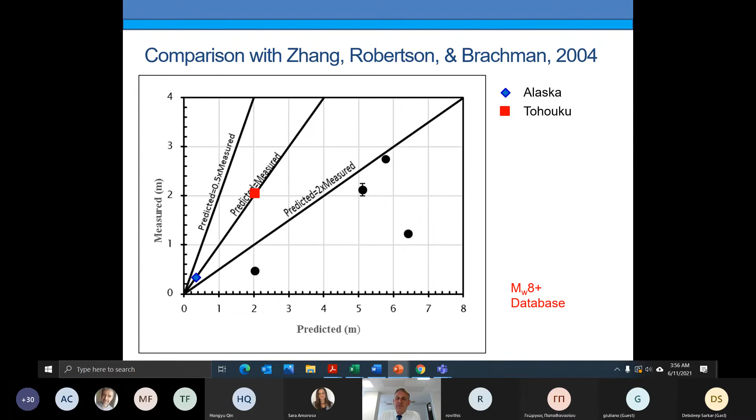But it may be that we don't need to consider the full thickness of the layer, and we need to limit the thickness that is involved in lateral spreading. So we use the Chetan approach to limit the depth that we're considering for displacements. And when we do that, even the Zhang, Robertson, Brachman approach gives values that are reasonable.

Quick conclusion: regardless of the method you use, I think you're going to have to deal with large variations in measured versus computed displacements. You might think, well, I'll use a numerical model with a spring or a residual strength or a sliding block model. Steve Kramer has analyzed some case histories with this approach as well and found out that the variation is even larger for those sliding block models.

We found that displacement is minimal with blow counts greater than 15. So for magnitude 8, we would probably bump this boundary up to 16 or 17 to be a little more conservative. Fines content and plasticity really decrease lateral spread displacements. So if you have a model that's predicting large displacements, you need to factor in the fines content to get a better estimate of what's going to happen.